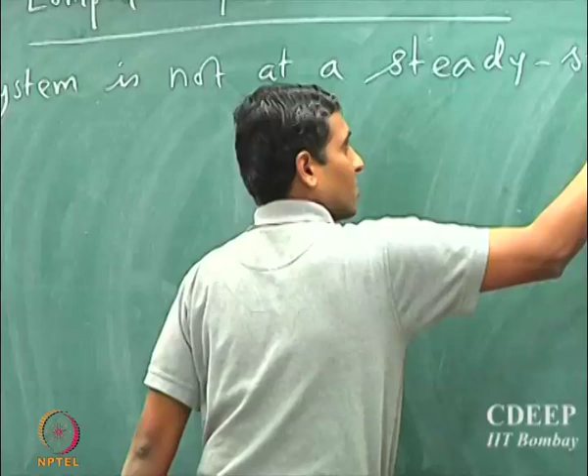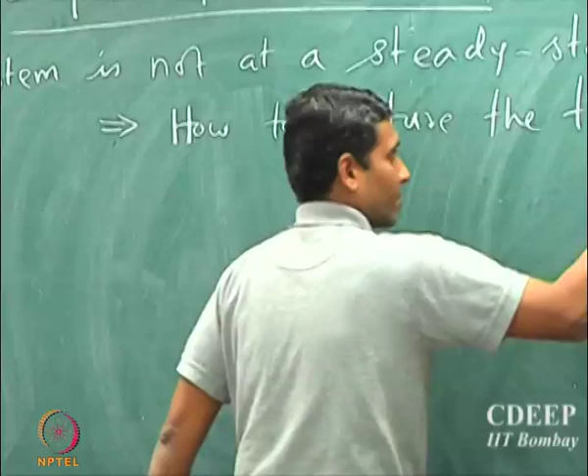This really translates into the question of how to capture the transient. What if the system is not maintained in a steady state? It's possible it's not maintained.

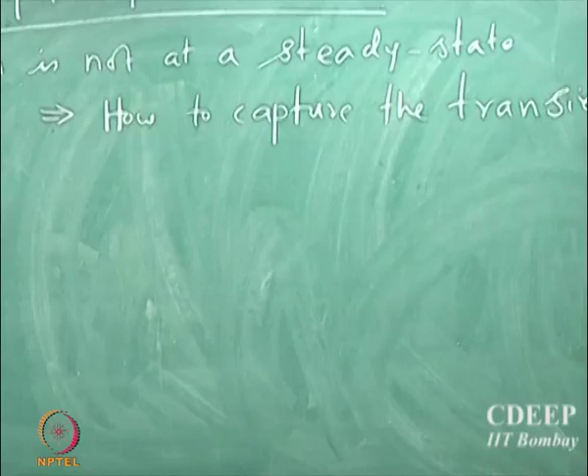A very easy example is you take a cup of coffee, tea or milk or whatever and just leave it on the table. There's really no steady state till the system reaches the same temperature as that of the surroundings. So really the steady state of a cup of coffee or chai kept on a table is the state at which every location or every particle in that cup actually reaches the temperature of the surroundings.

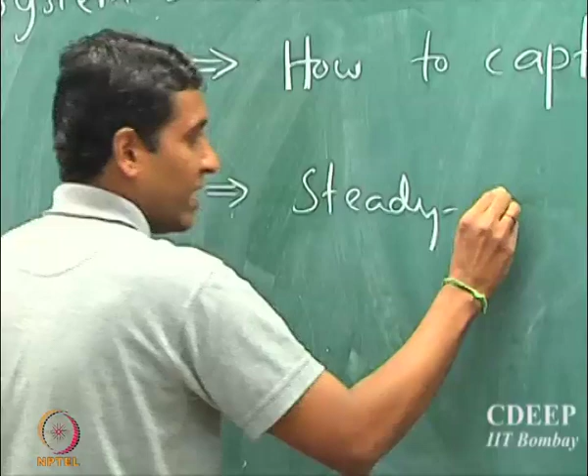Or the steady state really here means steady state is equilibrium with the surroundings.

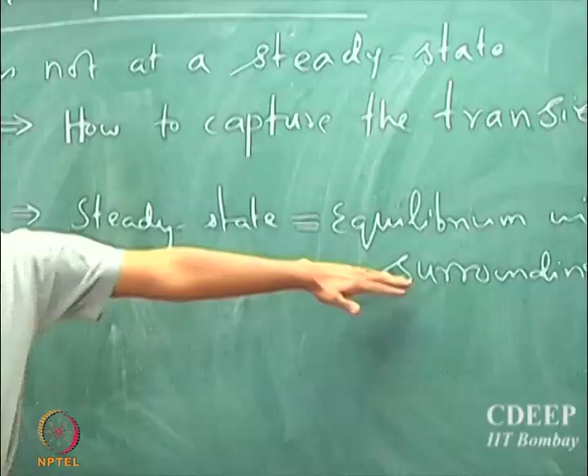So all the cases that we have seen, all the models that we have written so far, except for the general model that we wrote, are all for systems where it has already reached an equilibrium with the surroundings. So the question is, that's not always true. There are systems where they may not be under equilibrium. So how do we characterize them?

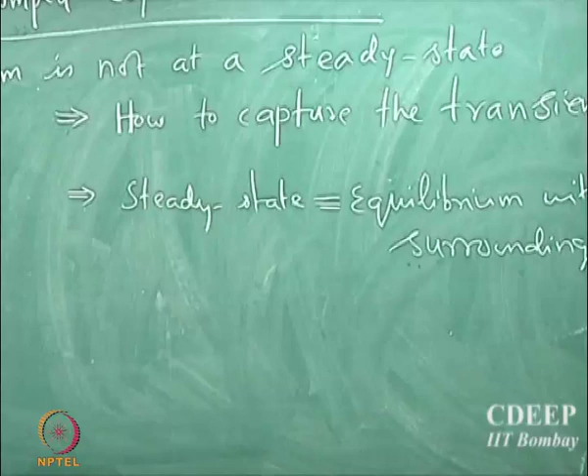How do we quantify them? And what kind of analysis and understanding can we get? That's what we are going to see in most of today's lecture.

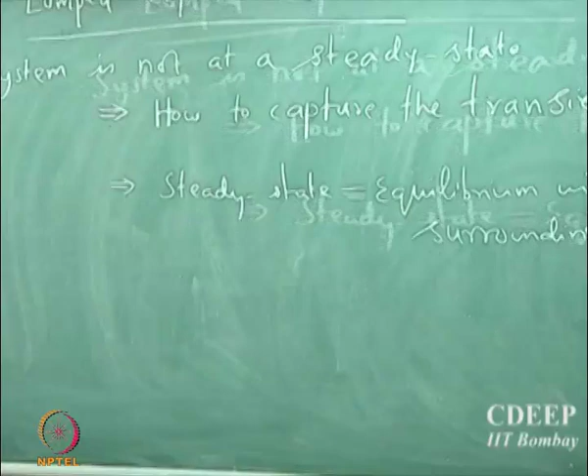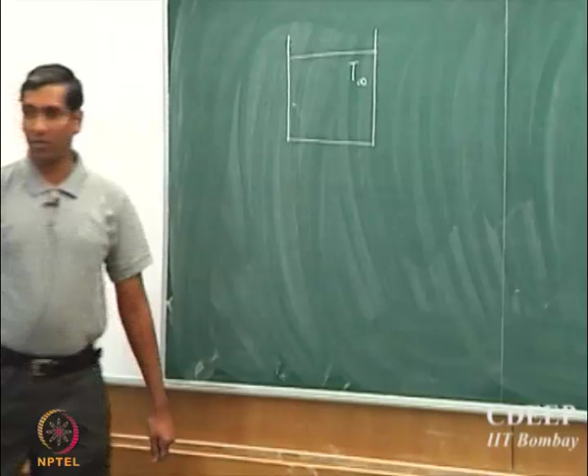So supposing we take a container filled with a certain fluid, and let's say that the temperature of the fluid is T infinity, so it's filled with some temperature, and let's say that there is some solid material whose temperature is Ti, and if I assume that T equal to 0, that is time equal to 0, is essentially...

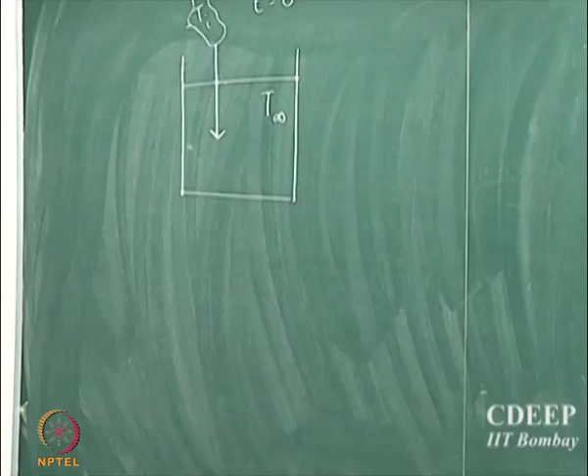when this body is actually outside the fluid, and at T equal to 0 I drop it inside. So I drop the solid body into the liquid. So supposing if Ti is greater than T infinity, as soon as you drop it, there is going to be exchange of heat.

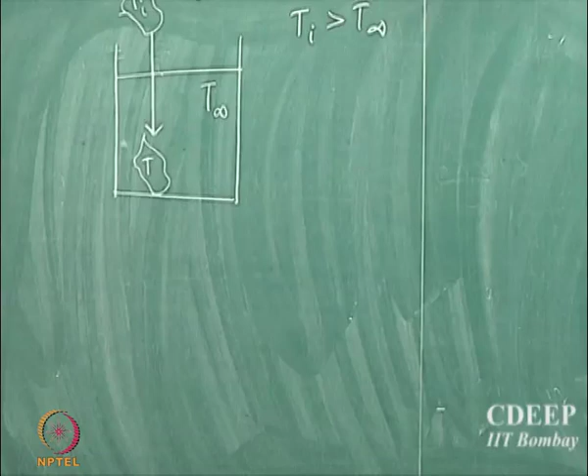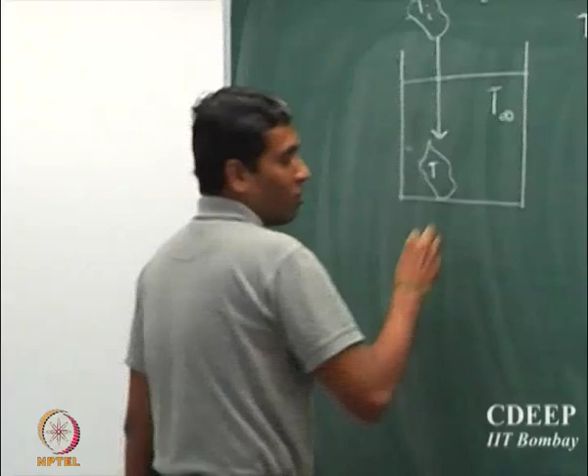So the solid, because it is at a higher energy state, at a higher temperature, will lose heat to the surrounding fluid, and then it will attempt to equilibrate itself with the surroundings. That's the normal process. So the first observation is that...

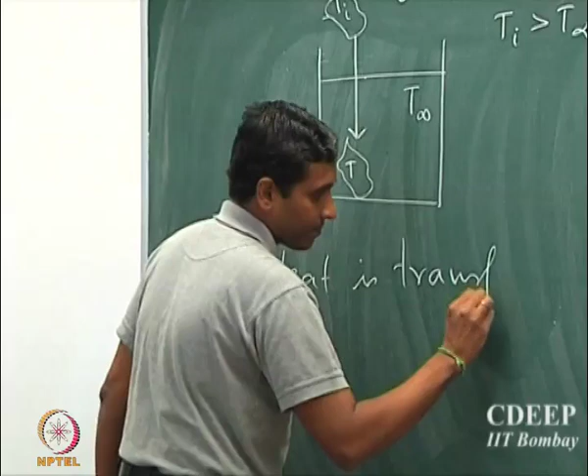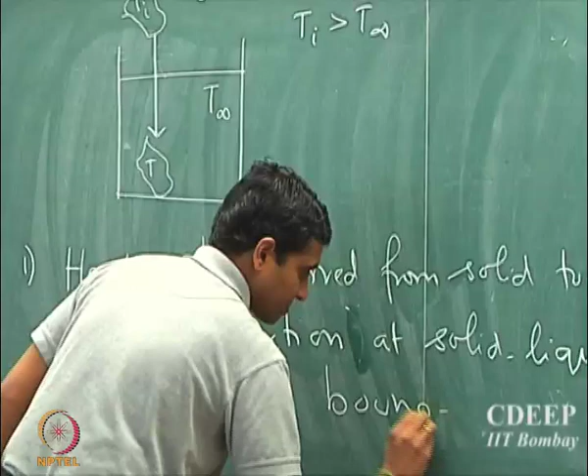heat is transferred from solid to liquid. What's the mode of heat transfer? Convective, right. So what really occurs is convection at the solid-liquid boundary.

What happens inside the solid? So there is conduction.

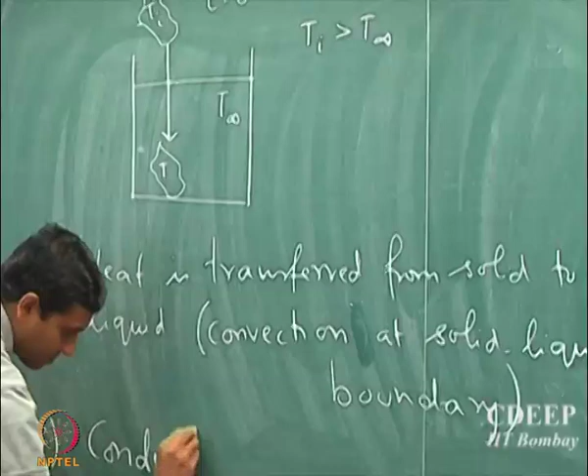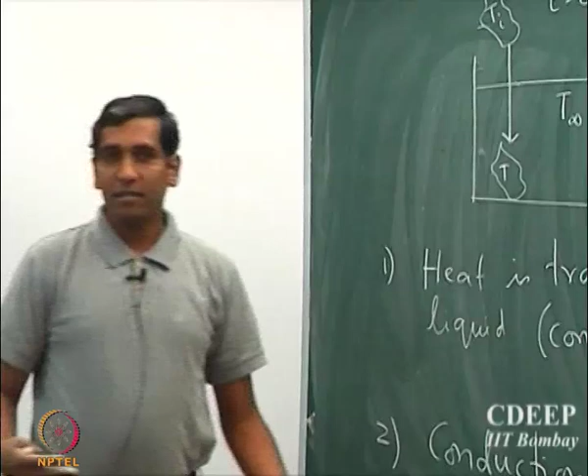So there are two ways to go about it. Supposing we say that the conduction is important inside, then we know how to write the model. We've done that. We said accumulation equals input minus output plus generation, etc. So if I assume that generation Q dot is 0, we know how to write it.

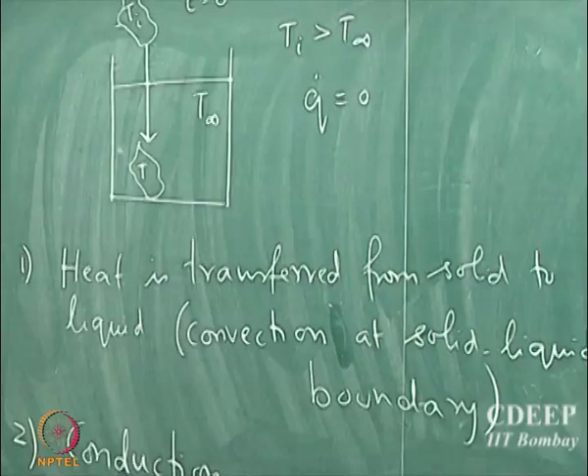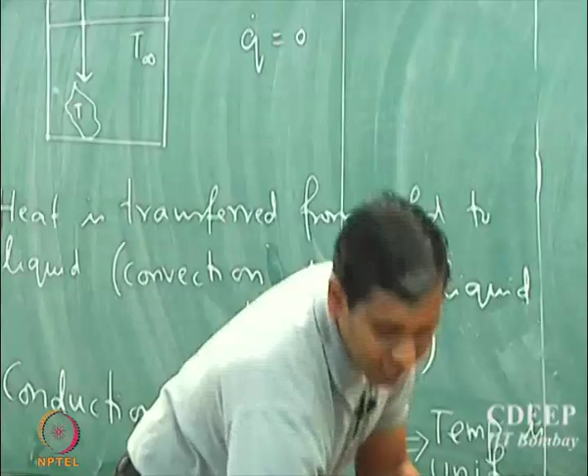Now, supposing the dimensions of the object are very small in all three dimensions, then one can do what is called lumping, a lumping approximation. What it really means, as we have seen before, is we assume that the temperature is uniform in the solid. So that's what we mean by lumping here.

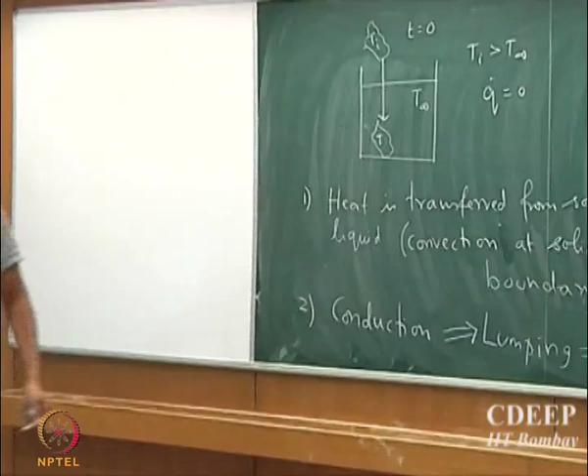Now, how do we model this? You want to try? How should we approach it? The objective is we need to quantify this process. Where do we start? The heat that is lost, if you assume that the temperature is uniform, whatever internal energy is lost to the fluid is equal to the rate at which the temperature is changing somehow, right? So there will be some proportionality constant, etc.

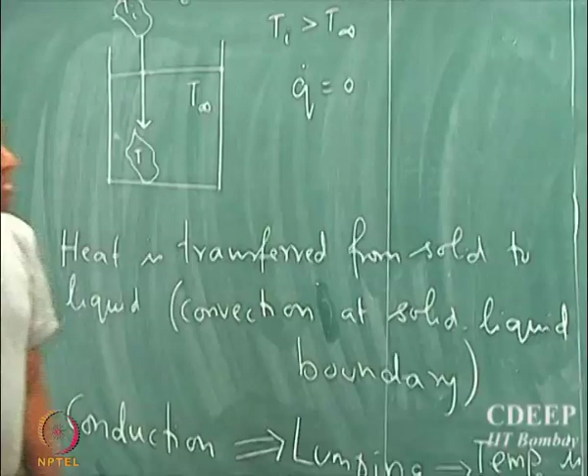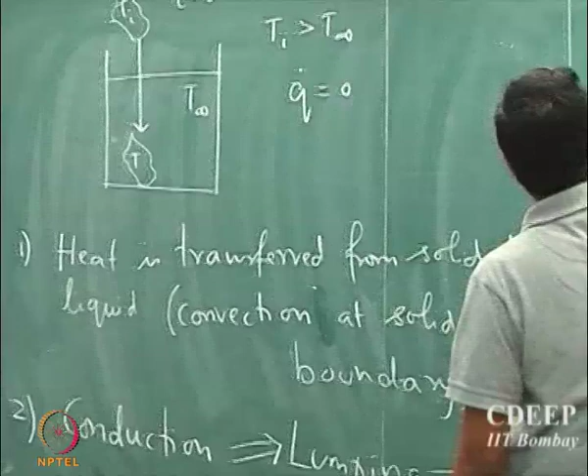So that has to be somehow related to the rate at which the temperature is changing inside the solid, right? So there are two ways to go about it, two ways to write the model. One is, certainly, you could start from the general model and then impose the lumping approximation.

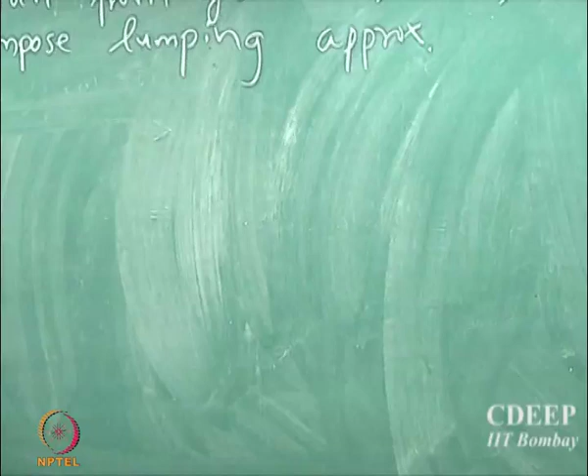It's not very difficult to do. In fact, it's very easy to do this. All you have to do is just integrate and substitute the corresponding boundary conditions. Now, a simpler way to do this, of course that involves some math. A simpler way is one can write the model from first principles.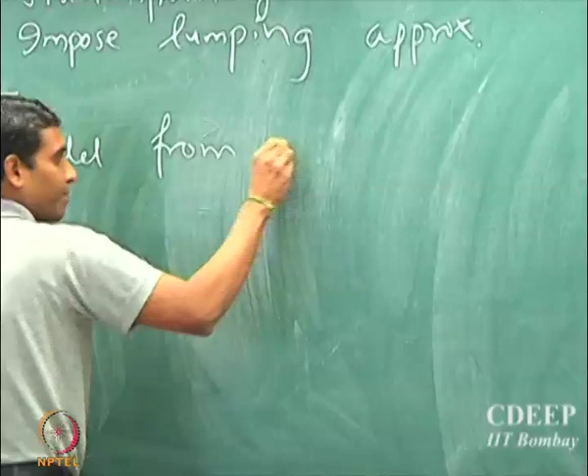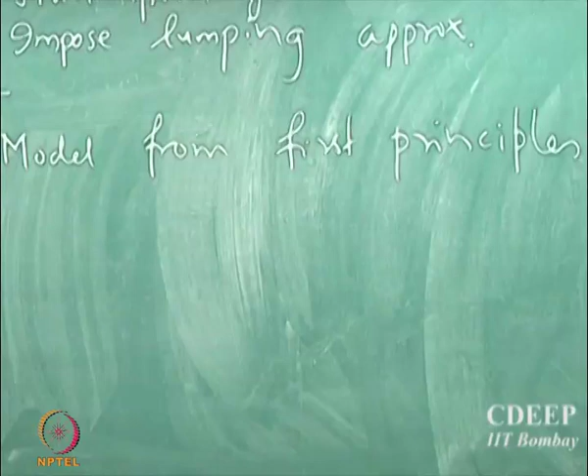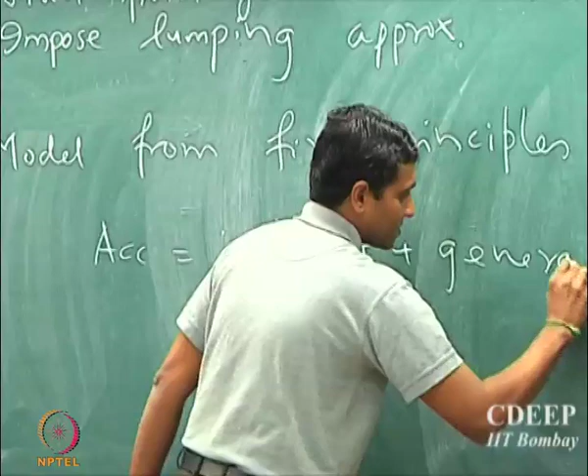A simpler way is to write the model from first principles. We know the common mantra for all of these: accumulation equals what comes in minus what goes out, plus what is generated. In fact, the original generalized model was also derived using this mantra, but if you use this route, whatever lumping approximation you would do by integrating would already be taken into account by writing the model from first principles. You could do either way, it doesn't matter, and you should get exactly the same model.

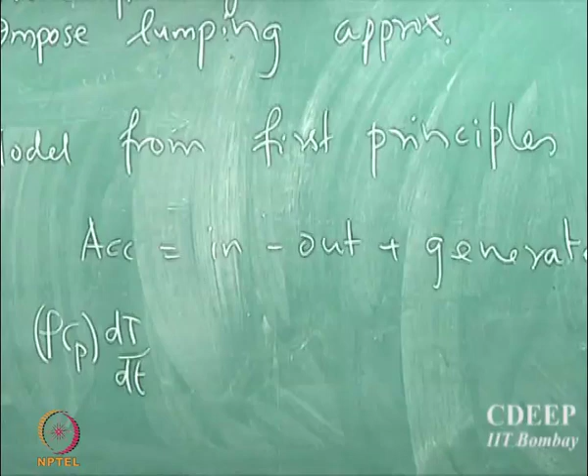So it's very easy to write this: rho Cp into dT by dt, that's the accumulation term. What's the input? What's the input?

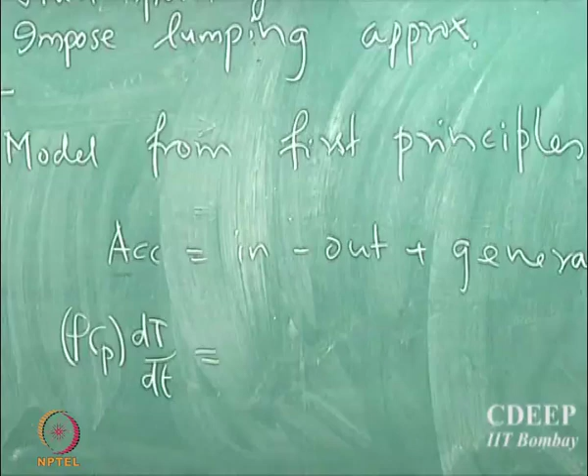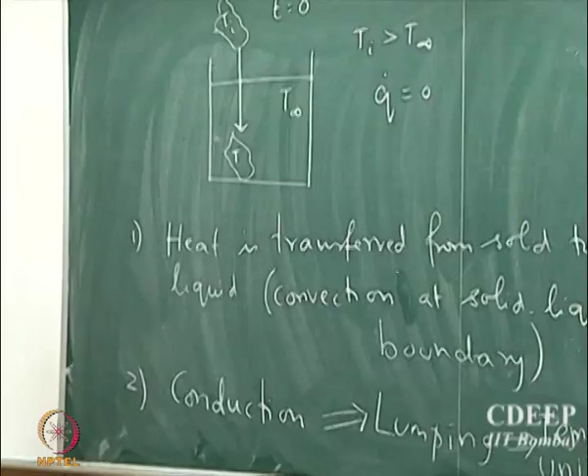The first thing I want you all to realize is that when we wrote this first principle route to find a general model, we wrote a differential balance. Now when we introduce the lumping approximation, there is no differential element here. So what do we do? We need to multiply this by the area.

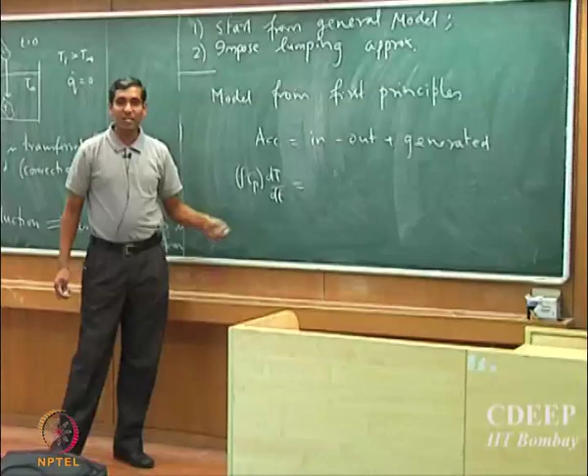That's not right. The first term here corresponds to accumulation. You should remember that rho Cp reflects or quantifies the amount of heat that is stored inside the system, inside the solid. That's a volumetric process. The capacity of the system or the solid to store heat is actually a volumetric process, not a surface area process. So therefore you have to multiply this by the volume of the system you are looking at.

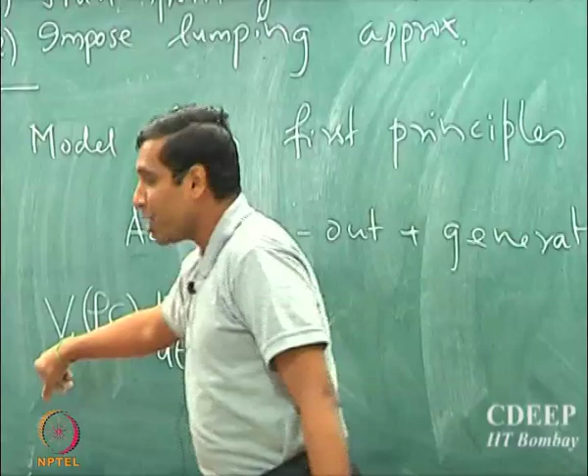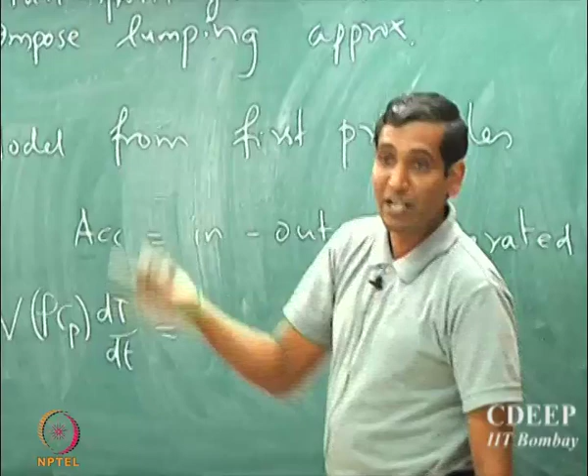If you do it from the first principle, from the generalized equation, and integrate, the volume scaling will actually come from the integration. In fact, it's a good exercise to try this: start from the generalized model, introduce the lumping by integrating over the whole volume, and you will see that the volume term will come as a scaling factor in the accumulation term.

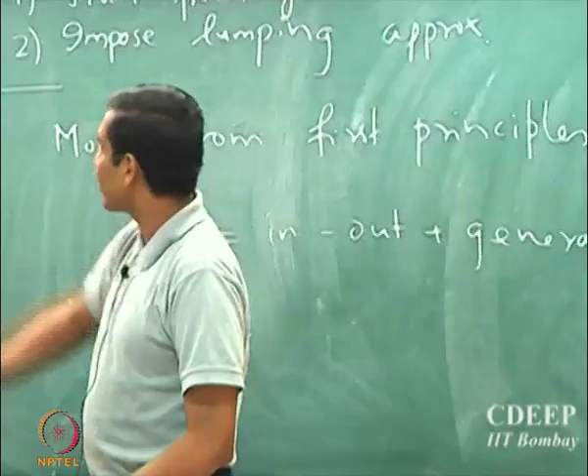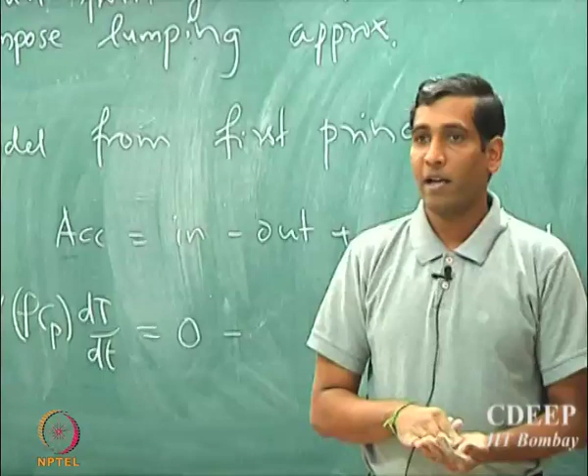So what comes into the solid? Nothing, because it's heated and suddenly dropped inside, so there is no heat coming into the solid, and so input is 0. What is going out? H into, that's the convective mode of heat transport, which is actually a surface area process, so it's H into the total area available for heat transfer, multiplied by the temperature difference. That's the amount of heat going out, plus generation is 0.

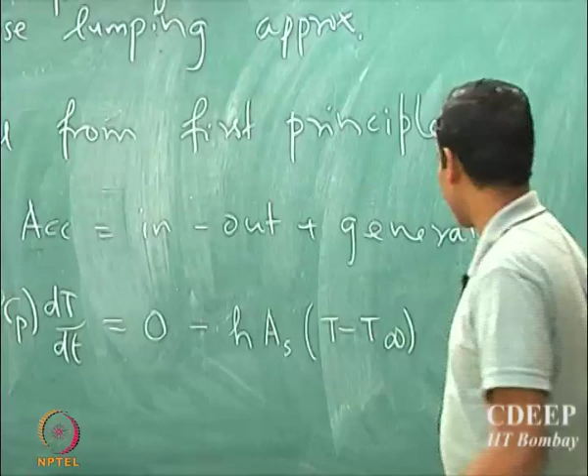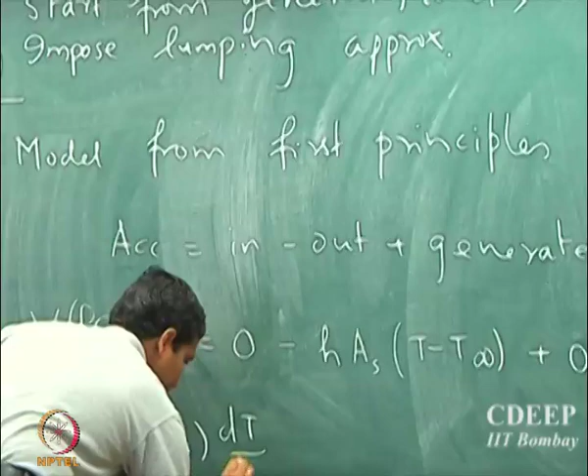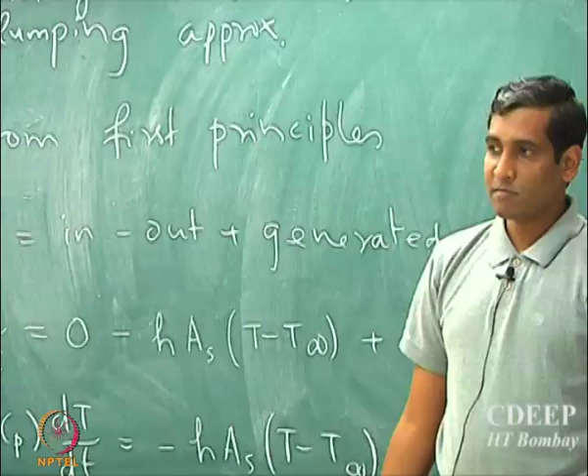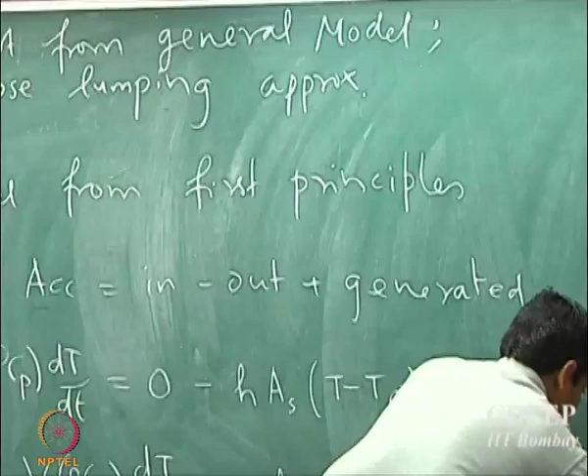So the model is very simple: V times rho Cp dT/dt equals minus H As times (T minus T infinity). That's the model. What's the initial condition? T is Ti, that's it. So the initial condition is T at t equal to 0 equals Ti. Is that clear to everyone?

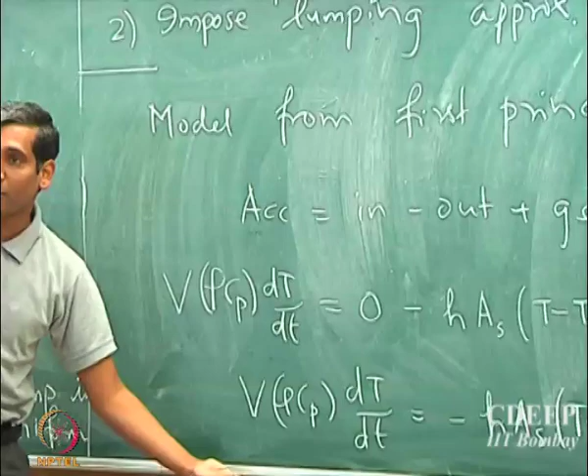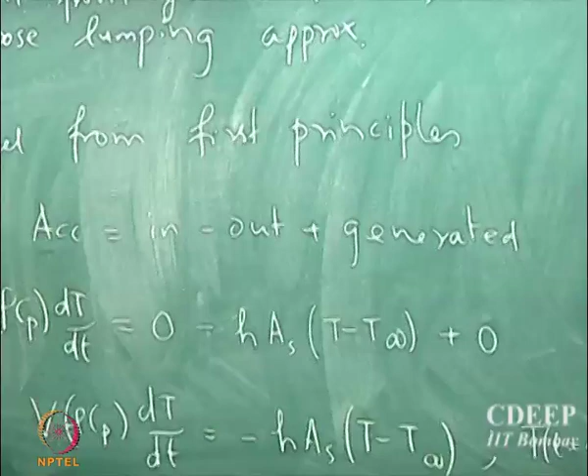So far we didn't get into this because it was not required, since we were looking at differential balances. You must understand that the capability of a system to store heat is actually a volumetric process, while its capability to transport heat is a surface area or cross-sectional area process. Whenever there is conduction, it's the heat flowing across a cross-section, and whenever there is convection from the solid to the surrounding fluid, it's a surface area process. You must understand the correct set of dimensions associated with each of these terms in the model.

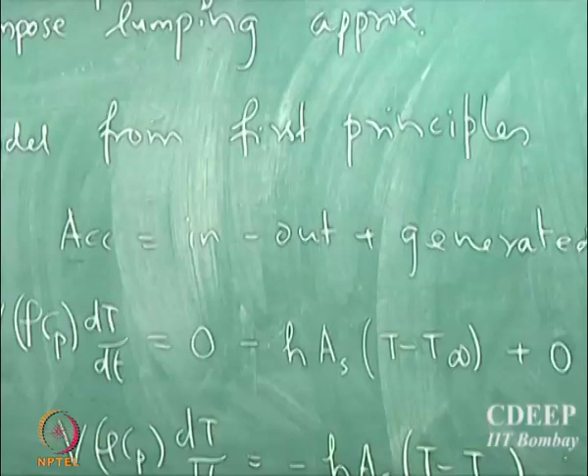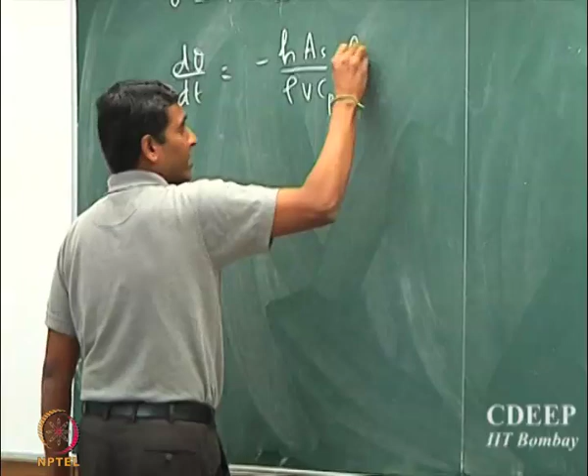So the solution is very trivial. If I assume theta is T minus T infinity, I can rewrite the model as d theta by dt equals minus H As by rho V Cp, times theta. And so the solution is theta by theta i equals exponential minus... that's the solution.

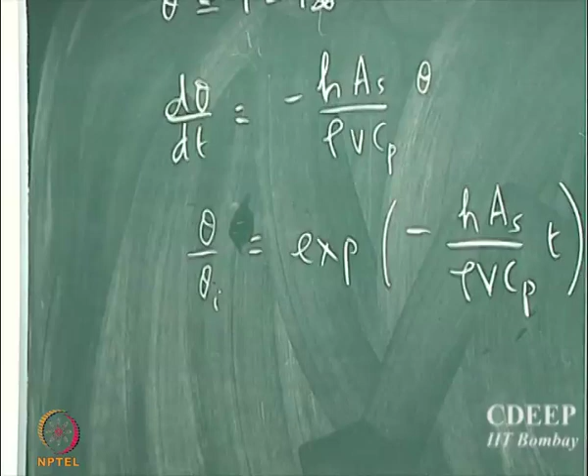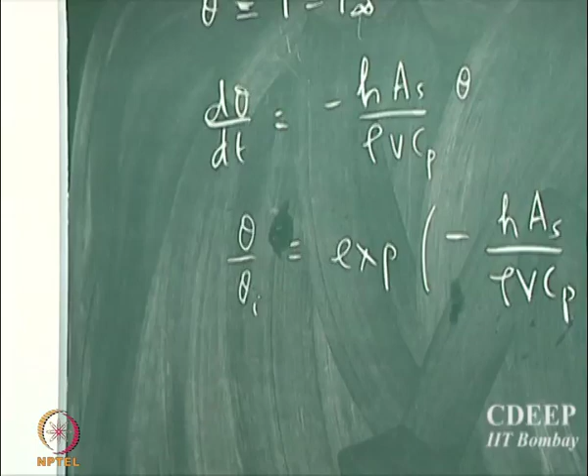What can we say about the coefficient in front of time? What should be the units of this coefficient in front of time? It should be 1 by second, right, because the quantity inside the exponential should be dimensionless. So if time is in seconds, the units of the coefficient should be 1 by second. So it really signifies a time constant.

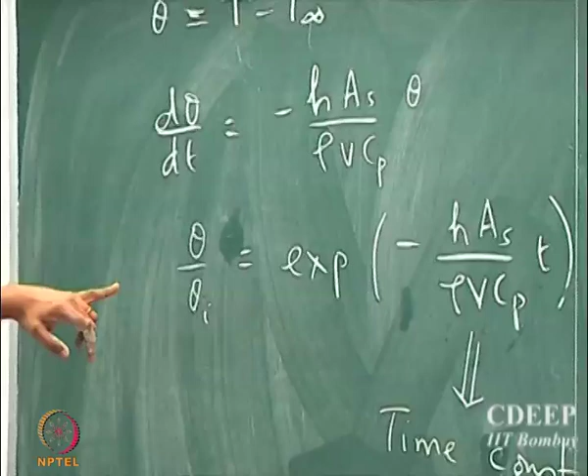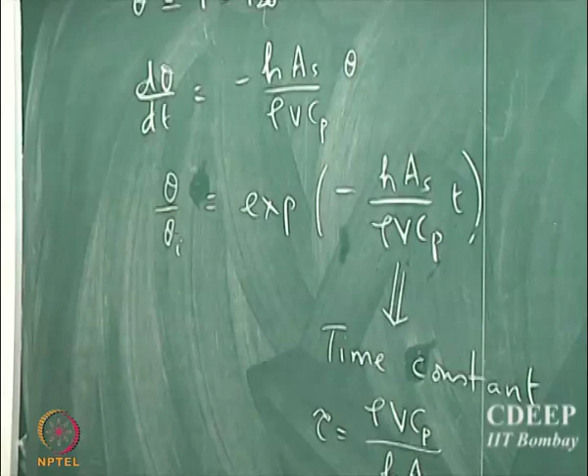Based on the coefficient, one could define a time constant for this process, tau equal to rho V Cp by H into As. If you plug in the units, you will see this will exactly have the units of seconds, dimensions of time. So one can define a time constant for the process, which signifies the time taken for heat to be lost from the solid to the fluid.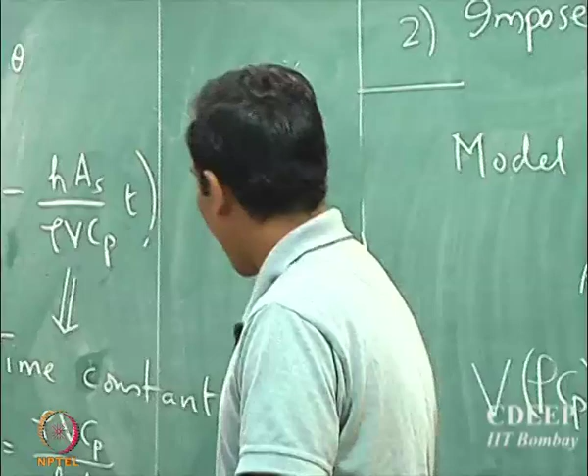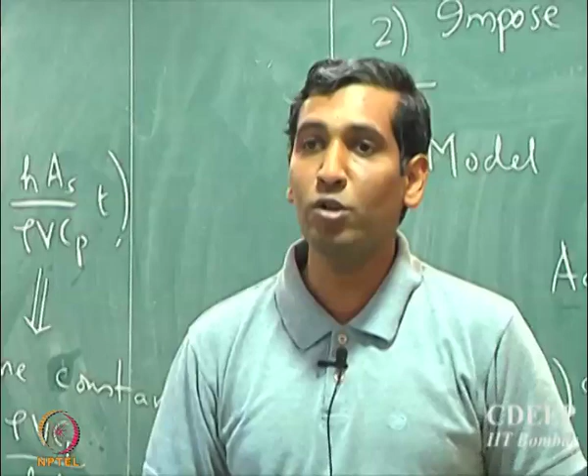Note that you can see two terms here, so there is once again a competing process. One is the ability of the solid to store heat, the other is the ability of the system to lose heat to its surroundings. So one could actually rewrite the time constant as something like this.

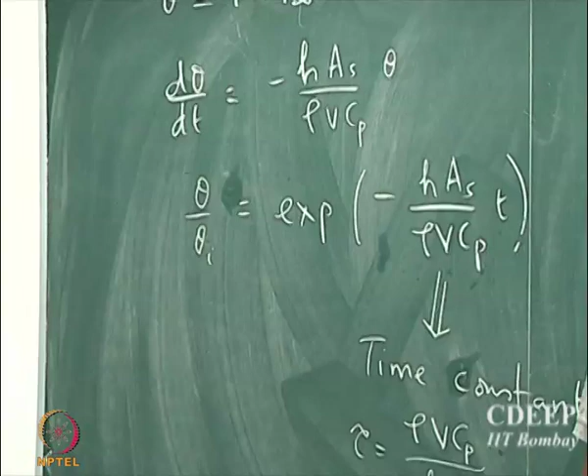So you can write tau as 1 by h into As into rho v into Cp. What is 1 by h into As? It's the resistance for convective mode of heat transport. So you can define this as resistance for convection.

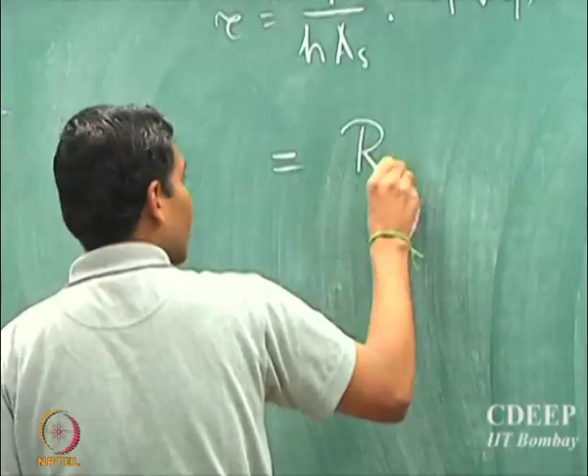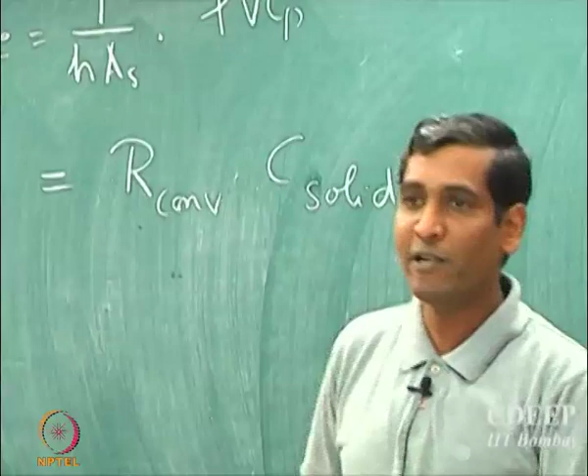What is rho v Cp in terms of electrical engineering terms? What is it? Resistors and capacitors. So it's the C of the solid, the capacitance or the capacity of the solid to store heat. So the time constant is simply the convective resistance offered by the system for convection of heat from the solid to the fluid, multiplied by the capacitance, that is the ability of the solid to store heat in its volume. Is that clear?

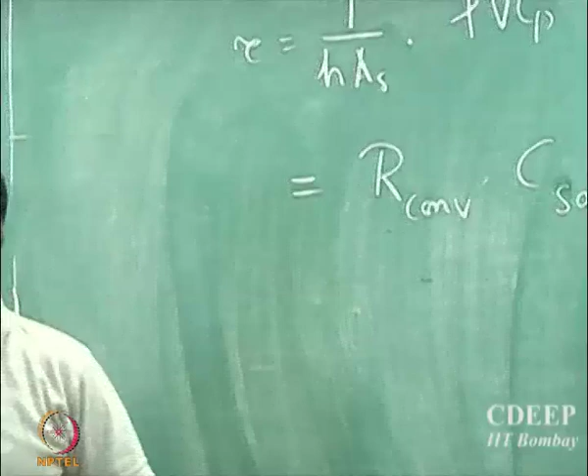So it's very important to understand time constants. In fact, this is probably the first time you're seeing in this course a definition of time constant, and you will see a lot more very soon. Mostly you'll see one more in today's lecture, and you will see many more in the future lectures. Why are time constants important?

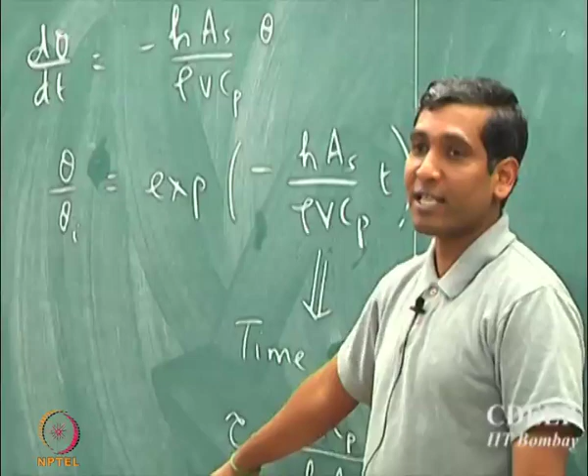Time constants capture the time that is taken for a certain process to occur based on the properties of the system. Note that these are all the properties of the system that you are considering. So if you know what the properties are, I don't need to know whether density is increasing or decreasing independent of the others. As long as I know what the time constant is, as long as I am able to relate the temperature change with respect to time constant, I am done.

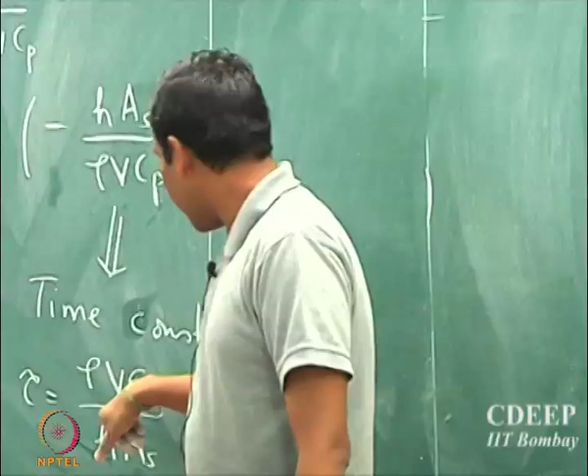I can actually play with many different parameters in order to achieve the same feature that I want. For example, I could increase the capacity of the solid by choosing a different material, and if I know how to change the heat transfer coefficient, which you will see when we discuss convection, then I could make sure that these two are simultaneously changed in such a way that the time constant doesn't change. So this provides an elegant method to compare the heat transport processes across different materials.

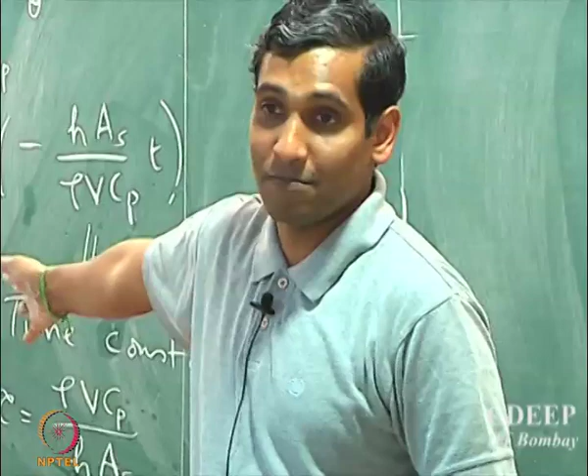Note that these properties are different for different materials - density, capacity, etc. They're all intrinsic properties of a solid, so they will be different for different materials. Defining such a time constant provides an elegant method to compare the rate of heat transport when you use different materials in the same system. It's very important to understand this, and you will see many more of such constants and dimensionless quantities in the future lectures. So I could draw a profile.

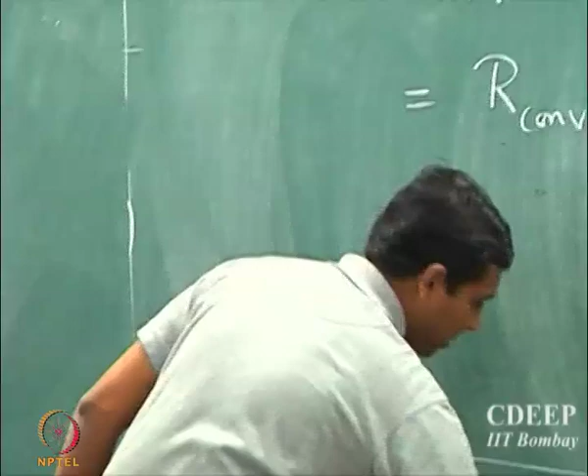It's a simple exponential fall. So this is time, and this is theta by theta I. At t equal to 0, theta is theta I, so it should start from 1.

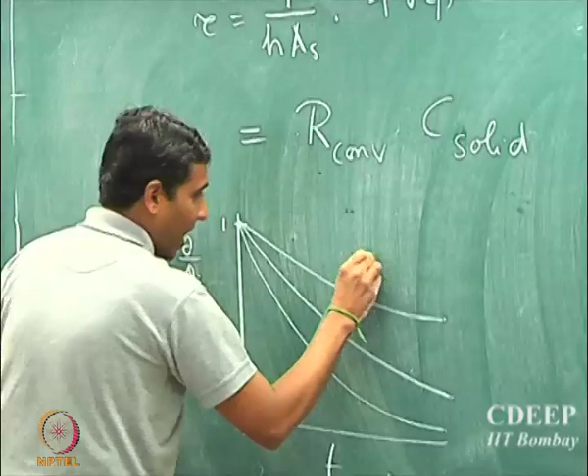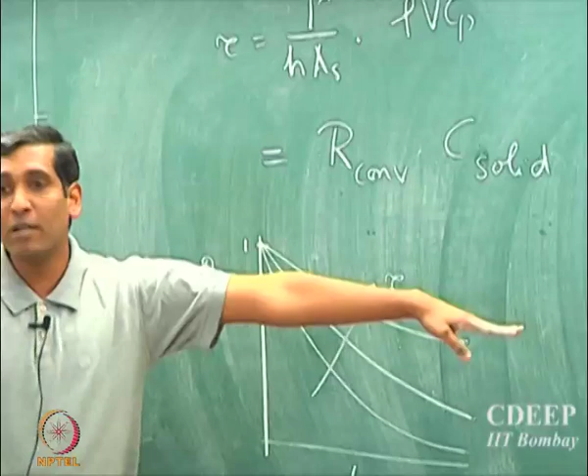As I increase the time constant, note that time constant quantifies, or gives you an idea as to the rate at which heat is going to be transferred. So as you increase the time constant, the slower the heat transport will be. It will take a much longer time to reach equilibrium.

What is the equilibrium? T equal to T infinity. So equilibrium is theta by theta I equal to 0. That's the equilibrium.

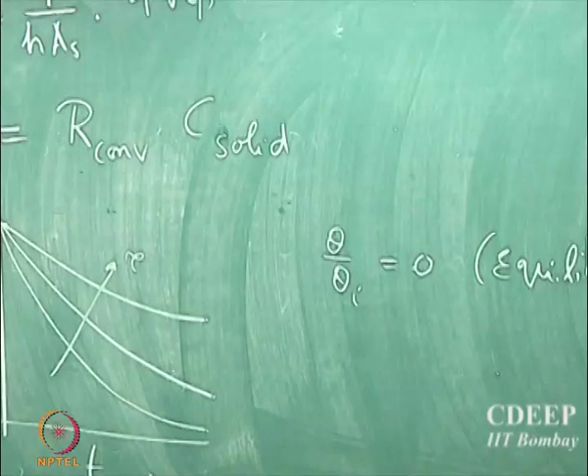So when the time constant is large for a given system, it takes much longer for it to equilibrate. Depending upon the system, whatever properties you want to have for a given system, it has to be designed so that you get the correct time constant, so that you should be able to predict when the system is going to reach an equilibrium. So this is a very simplistic example.

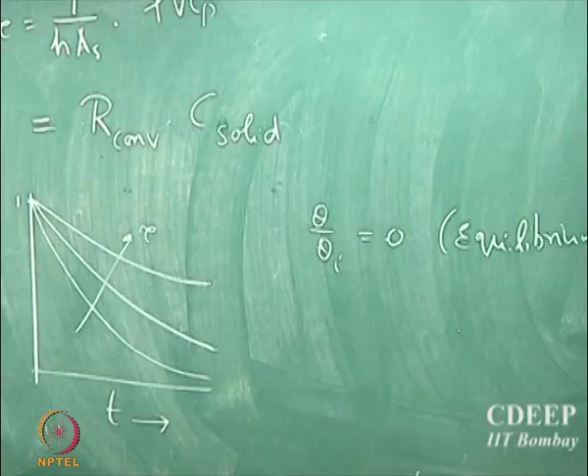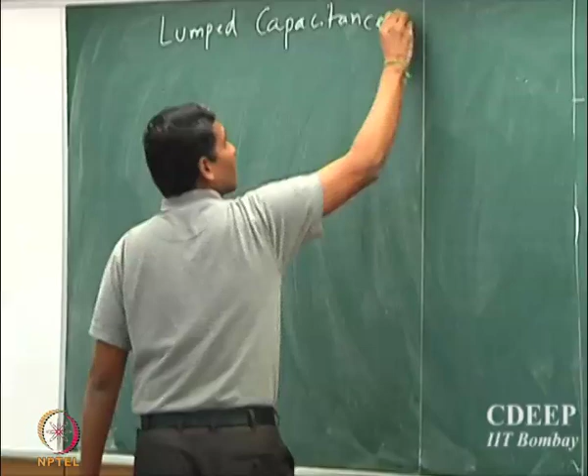Now this leads to an important question actually. We said that we made a lumping assumption, or lumped capacitance. So the important question is, when is it valid? What is its validity? Can we quantify the validity of this method? It's not enough to say that the dimensions are small and therefore I can approximate it to be uniform temperature.

If the conductivity of the solid is high, that's not necessarily, not always sufficient. It's not just the conductivity, it also depends upon the dimensions, right? So it's both the property of conduction and the dimensions of the system that you are looking at. So what we are going to see now is how we can incorporate all the properties related to the conduction and convection process, and come up with a quantitative quantity which can be used to justify when this method is valid.